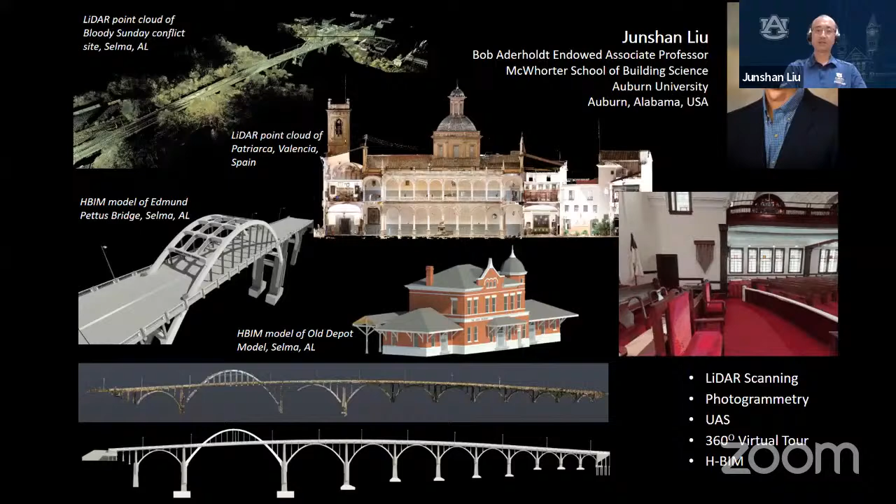So my name is Junshan Liu. I'm a faculty member at the School of Building Science at Auburn University in the US. Let me share some slides highlighting my research and teaching at Auburn University. As Dr. Ding mentioned, I've been working extensively with heritage structures, including buildings, bridges, and even battleships. My expertise is on documenting and digitally recording those structures, then presenting them to the public, and also digitally preserving those important heritage sites.

I've been in BUCA, I call that probably my third home. I originally came from China, that's my hometown, and then I came to Auburn for 20 years. That's my second home, and BUCA is my third one. I've had so many visits with faculty and students at BUCA.

Continuing on background, I received my civil engineering education back in China, before 2000. Then I started working as a construction engineer, later became a project manager in Shanghai, before coming to the US. Then I studied building science and became a faculty member at Auburn since 2003, so you can tell how old I am. I've been teaching for over 19 years. This fall I'm starting my 20th year of teaching academic career.

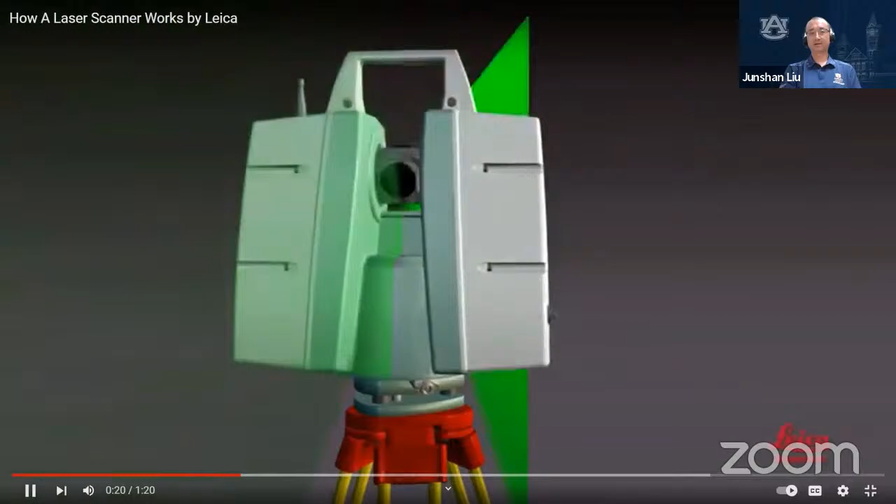It's explaining how the Leica brand laser scanning works. It shows the laser, the green. It allows the beam to reach the object and bounce back to the scanner, so it detects the distance from the objects to the scanner. All the measurements are recorded as a 3D point cloud, showing the angles, the distance, the XYZ coordinates of each point. So here's the result of the scan, the 3D point cloud, just a lot of points.

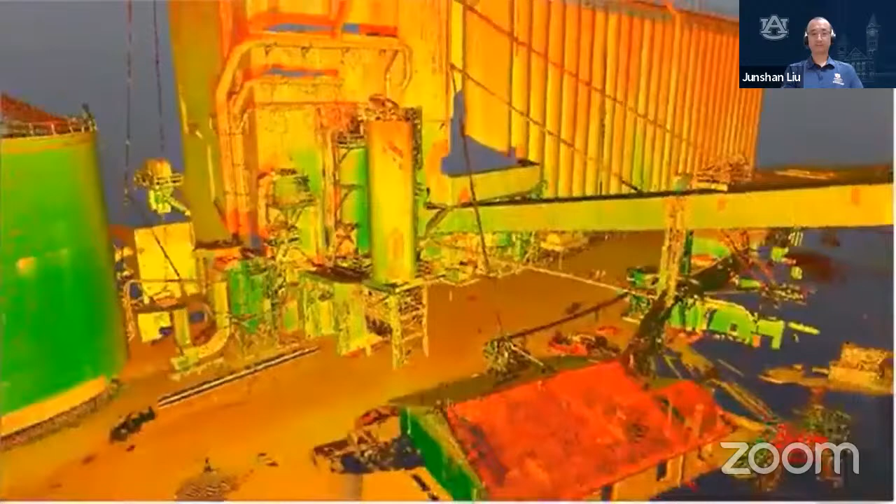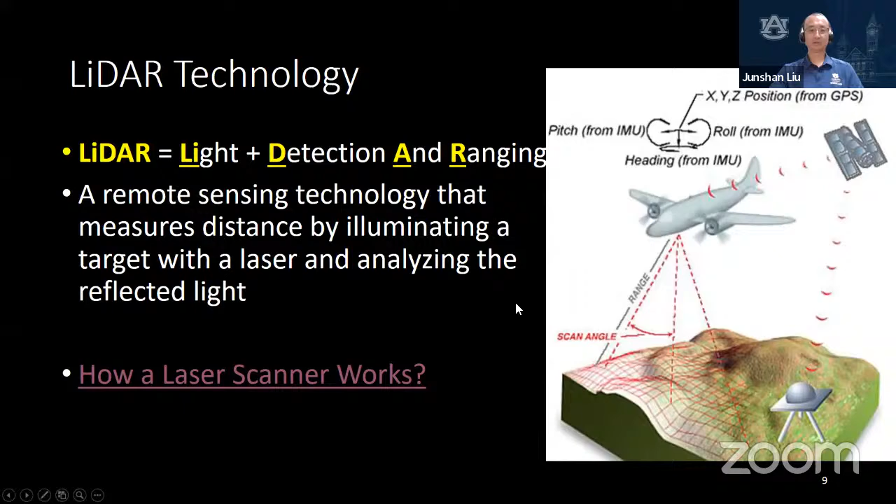The point cloud also has a technology called colorizing. It assigns colors to the points, and at the end you have this colorized three-dimensional point cloud. I'm sorry you couldn't hear the audio, but I can share this YouTube video with you after the presentation if you're interested. So here's the 3D point cloud. I'm going to show you the point clouds I captured in the next few slides.

The device we use for LiDAR is called a laser scanner or LiDAR scanner. There are quite a few manufacturers making and selling them, and I've been using two different brands. I started with a Leica ScanStation C10, about eight years ago. You see on the left it's a really big scanner, about 50 pounds or 23 kilos, just the device. It's also really expensive; I'll show you how much that costs.

The second and third ones are both manufactured by Faro, so they're much smaller. For us to use them in construction management, we'd like something smaller and mobile, so we can put it under the foundation, under the structure, in what's called a crawl space, and also in really tight spaces, like in a battleship. So those scanners became more popular and much more affordable. So I want to show the specification for each scanner here.

As mentioned, the Leica scanner is really big, right, heavy, but the technological feature is quite impressive. It can capture 50,000 points per second. So that device shoots out a lot of laser beams per second, and can get like 50,000 points. That's a lot of points per second.

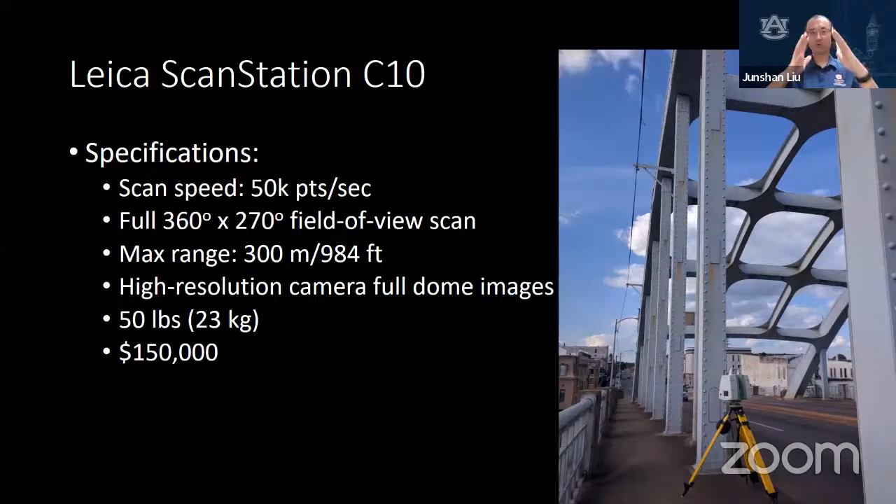This thing can spin 360 degrees horizontally and 270 degrees vertically. So the scanner will not be able to capture right at the end of the tripod, as you can see in the picture. That's kind of the blind spot or angle for the scanner. It can reach really far, as far as 300 meters or a little less than 1,000 feet. That's long distance in terms of laser scanning.

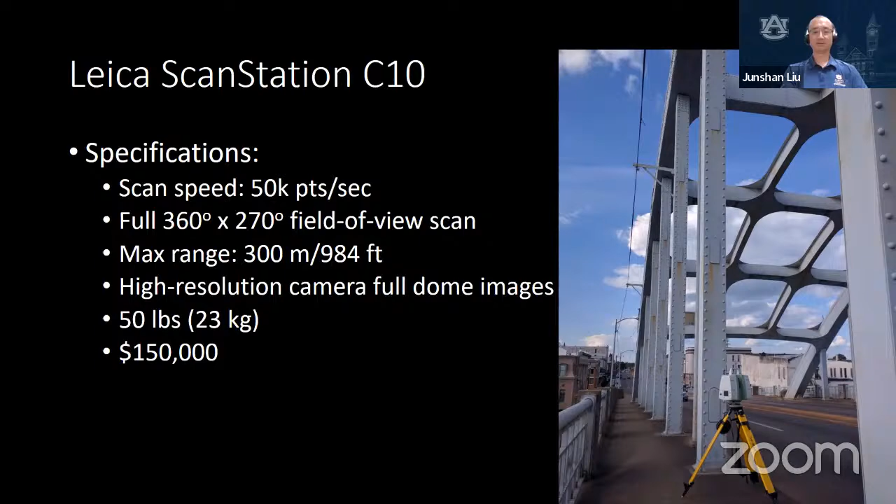It also has built-in high-resolution cameras to take some pictures, and it's big, right? 50 pounds, and it costs a lot of money. It's $150,000 at the time we bought it, that's 8 years ago. That's a really expensive device, and that's only for the hardware. It costs more to purchase the software, and also costs a lot more to have the people to operate and maintain the device.

So the next one, I started using the Faro X130 about 4 years ago. It's a smaller scanner. It can actually capture more points, almost like 1 million points per second, 20 times the one you saw on the Leica. The same field of view, right? 360 degrees horizontal and 300 degrees vertical. And the range is actually shorter, 130 meters compared to the Leica, or 400 feet. And it has a built-in HDR camera.

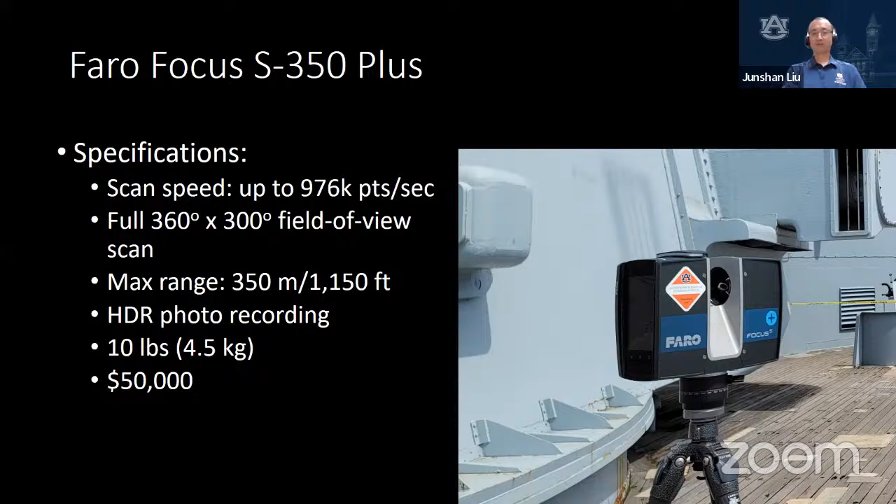It's much, much smaller, 1/4 of the Leica, so that's one I can carry really easily in a building or a really tight space. It costs less than 1/2 of that of a Leica. It's $60,000. Then about 2 years ago, I started using the newest model called the S series by Faro. It captures about the same number of points per second, a longer range, 350 meters, only 10 pounds, and less expensive, like $50,000 for the hardware. That's a lot more affordable now. Technology has gone a long way.

All right, what I scan. Talking about all the LiDAR scanners, things started getting boring, but I want to make it more interesting. As I mentioned in the beginning of my presentation, I work with a lot of heritage structures: buildings, bridges, roads and ships. At Auburn School of Building Science we teach construction management, so we work with new buildings on project sites, and I have been scanning a lot of ongoing construction projects.

So this is one of the structure labs I scanned in March of 2021 on Auburn campus, right after the steel structure was erected for the building. The purpose is to document the steel, like the columns, the beams, the girders, and also the connections, because those steel structures will be enclosed later in the construction process by the walls, the glass curtain walls, the roofs. So people won't be able to see the majority of the steel members.

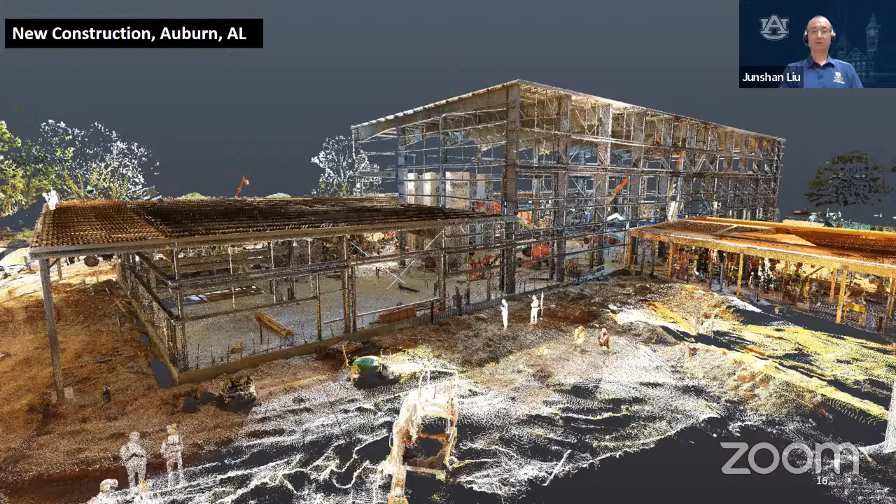But down the road, if the building goes through renovation or maintenance, people need to identify the exact locations and condition of the structural steel, and they will have a problem, right? But if we have a digital record, the latest scan of this, we can open up the point cloud on a computer to show them exactly where those structures are and what condition they were in when they were erected.

So here I'm going to show the close-up or detailed view of the scanned point cloud of the structural steel. As you can tell, it's really detailed and comprehensive coverage of the steel part of the building. And the accuracy, you will hear me say that word many times in the presentation, is very, very good for laser scanning. It can be as accurate as 2 millimeters. So that gives you the capability to go into the point cloud on your computer and take a measurement of the structure. That's something that wasn't available before LiDAR technology.

So this is another construction site that I scanned last May. It's another building on Auburn campus. I have a few slides talking about that later, but you can see this kind of documentation or record of an ongoing construction project. You can see the slab, right? The concrete slab or the floor. There's a lot of construction materials.

In the background, there's a structure called a metal stud. So this metal stud is kind of a framing member for the partition walls, which will be covered by the drywall. So we have a record of that. It can be easily accessed.

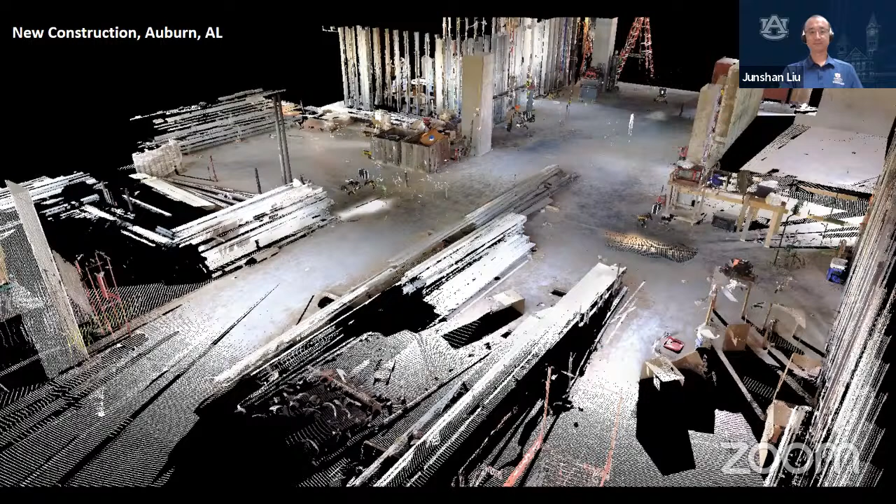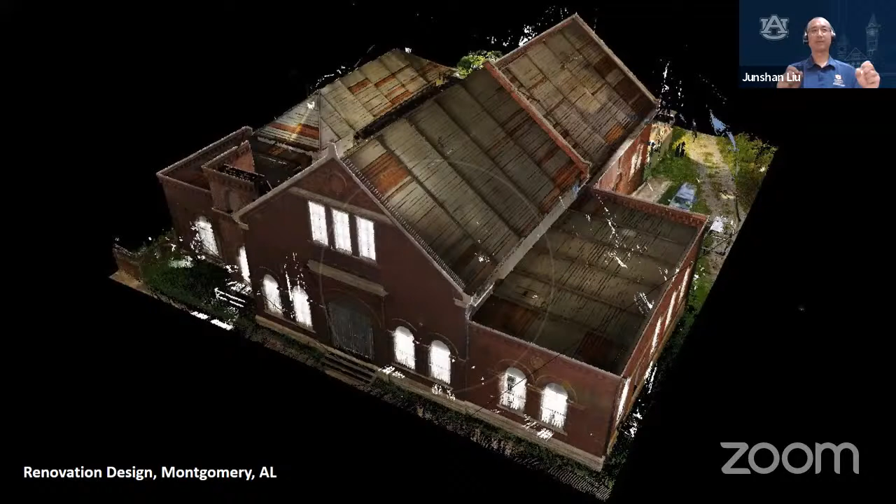All right, so here is a renovation. I scan a lot of buildings, like heritage buildings or existing buildings for renovation purposes. You know, when you need to design a retrofit or renovate a building, reuse a building, you need to have an accurate measurement of the existing condition of the building, right? And then the designer can use the measurements to come up with a new design.

So this is a 3D point cloud of a scanned building, and that's the interior of it. I just removed the roof on the point cloud so you can see the inside. It's a water pump house. So there's a lot of heavy machinery in the building. So I scanned it before the demolition of the heavy machinery, and I also had another scan right after. You can see the space opens up.

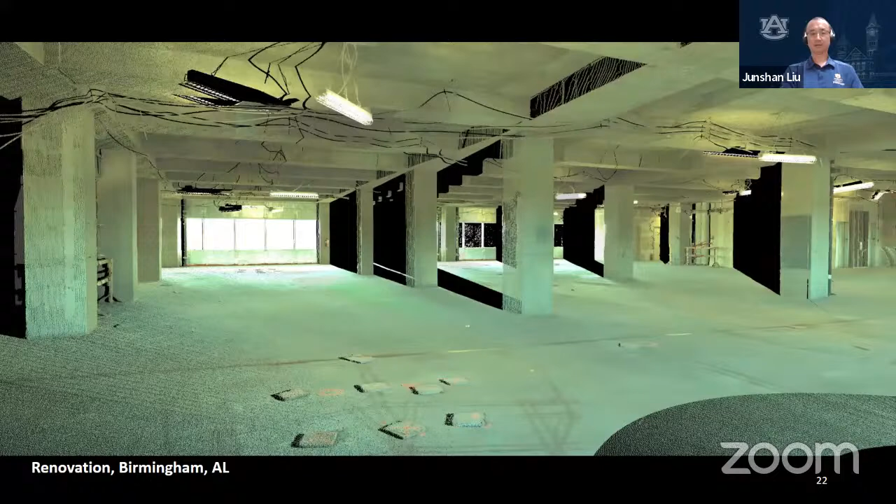So this, again, is a really accurate digital record of the building. So people use that for design. It's another project I scanned in Birmingham. That's an older scan, also for a renovation purpose.

All right, so here, people may ask, how would you do the scan, right? Do you just take one scan to cover the entire building, or do you have to do multiple scans? So normally, LiDAR doesn't go through any object. So to cover a building, especially inside and outside combined, you have to set up the scanner at multiple locations, around the building and then inside the building, in all the rooms you want to scan.

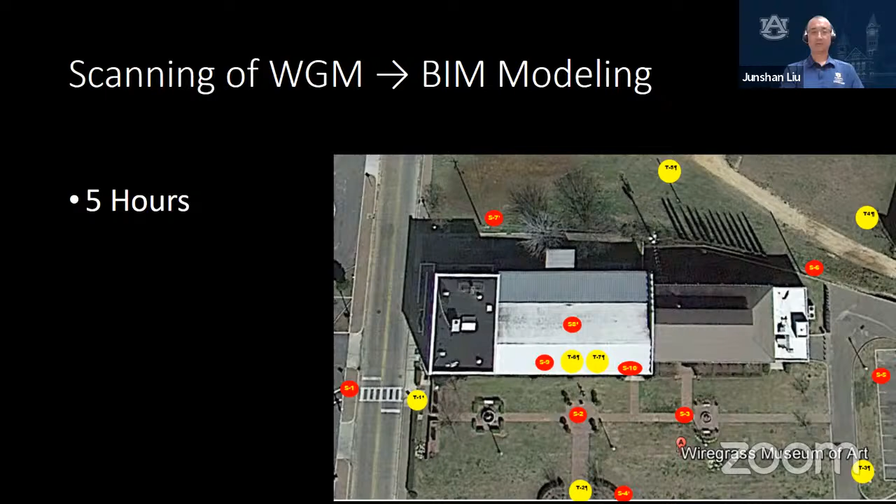So the picture here is actually one of the older projects I did years ago. I used the LiDAR, the older Leica scanner, the Leica C10. It took me 5 hours. I set up 7 different targets. The targets were used as reference points to connect the multiple scans together. And I set up at 10 different places.

You see the red dots, right? It's a small museum building in Alabama, so you can see the red dots. It covers 7 of them outside and 3 inside for the entire coverage. Then at the end, I had 780 million points captured for this point cloud.

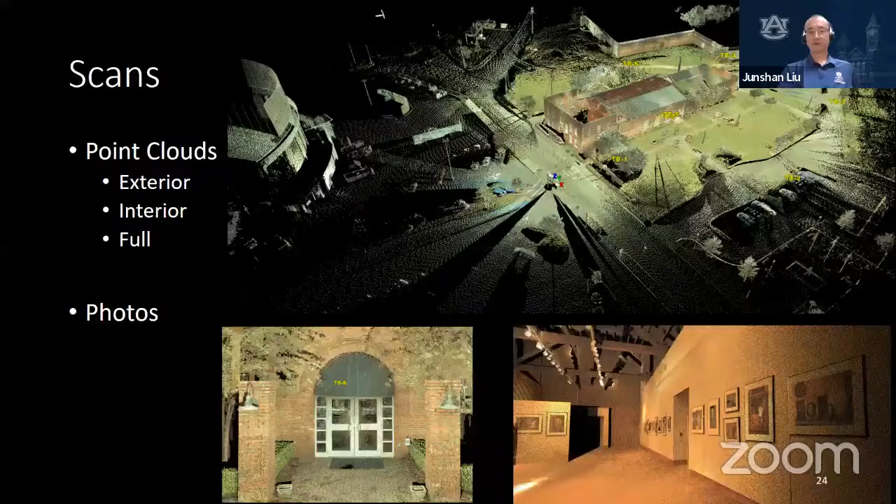So here are the pictures of the point cloud we recorded using the scanner. You can see the overall image on the top right. Then there are 2 smaller ones highlighting the front entrance and also the interior. Because there are so many points, it almost looks like a photo, right?

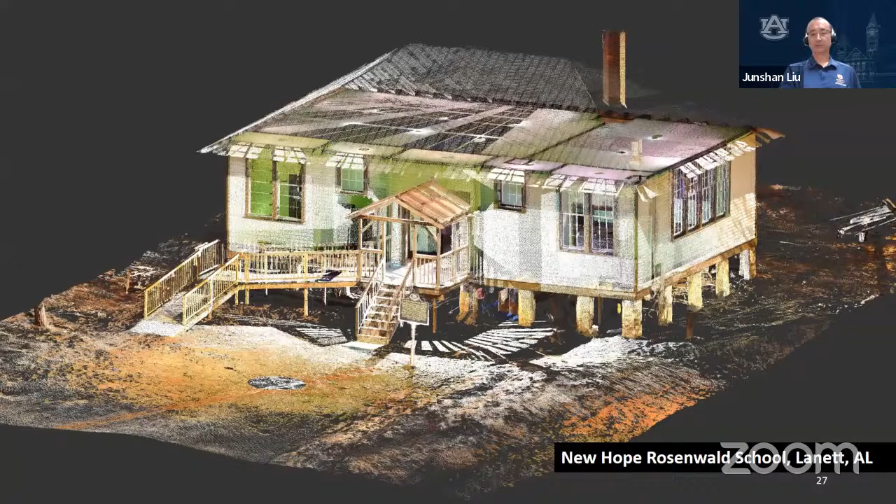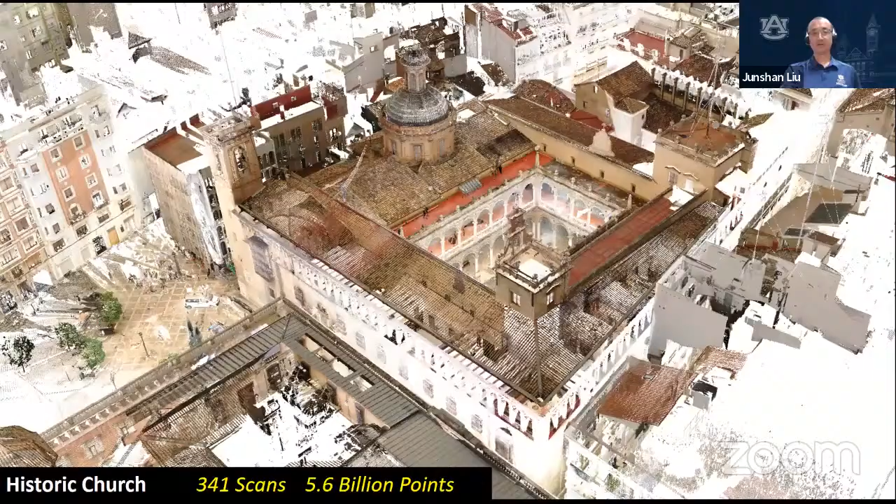For this one, I had over 300 scans. At the end, we captured 5.6 billion points. That's with a B, so that's a lot of points. So here's another cut, another view of the point cloud of the same building, just so many points.

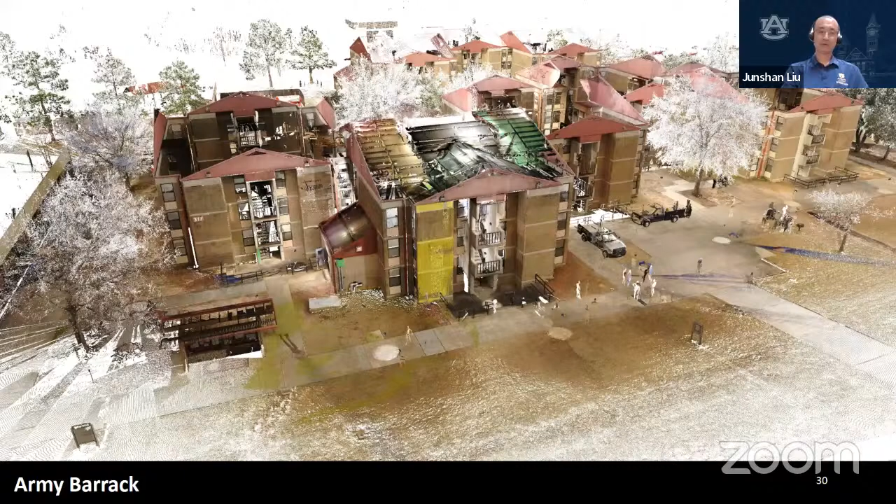All right, and also I work with the U.S. Army Corps of Engineers, on military construction. This one is the Army barracks I scanned in Georgia. So this is also a large project. It took more than 130 scans for renovation purposes, and they got 1.8 billion points.

All right, and I also work with battleships, right? The World War II naval ships. So this one is called the USS Alabama battleship in Mobile, Alabama. I had a project with them.

So here I want to show you guys a small walkthrough, like an animated video of the captured point cloud. This point cloud is just a small fraction of the entire battleship. So I spin this again. It's not a model or a picture. This is just a point cloud. It has, I think, like 1.8 or 1.7 billion points.

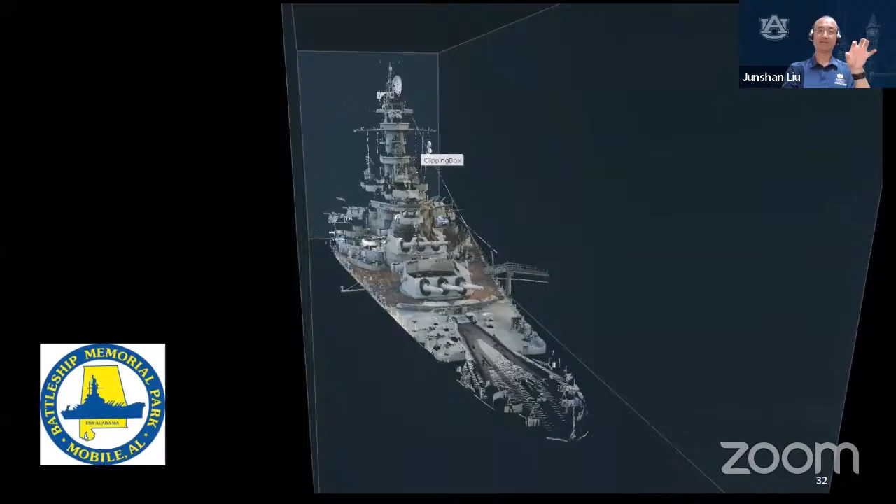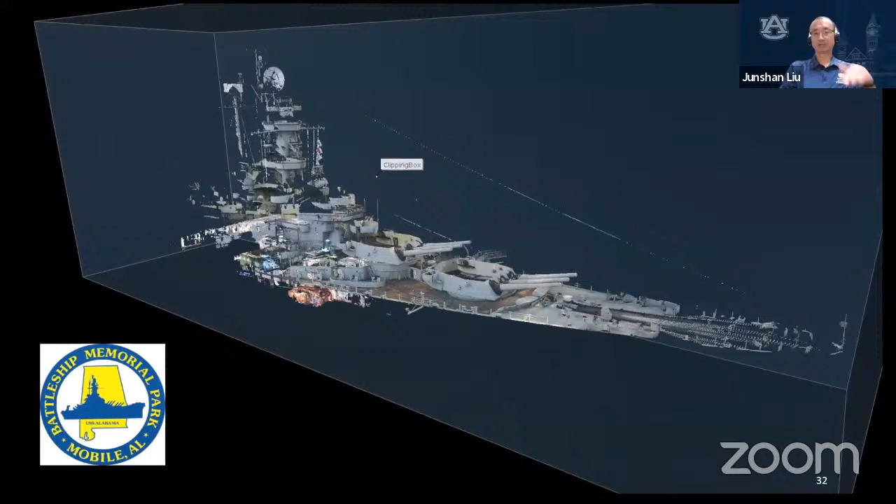It covers the front, which is called the bow of a ship, right? The front, you can see the main guns, the superstructures, and also I had some scans taken inside of the battleship. As you can see, the end of the deck, the middle, it looks like purple. So now we're getting close to the deck, and then we'll go inside.

So showing this, I want to give you an understanding of how detailed the point cloud can be, right? And what it can capture. So those are like a black box hanging in the air. That's where the scanner was set up.

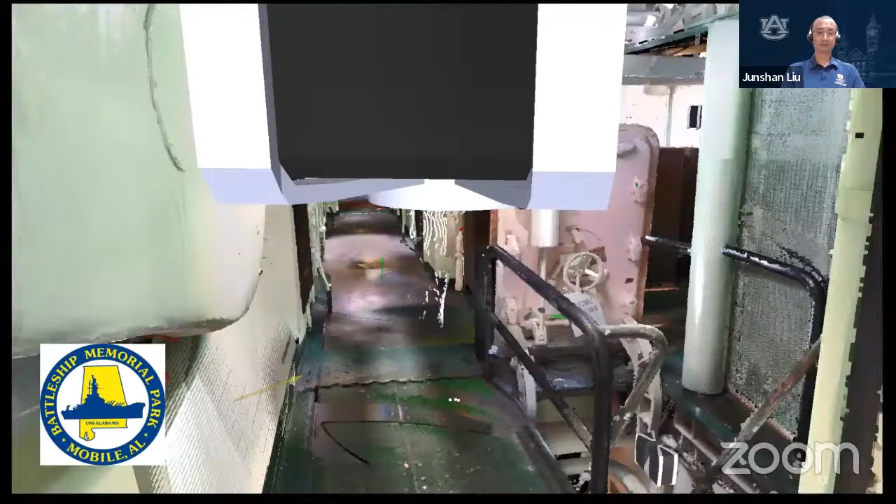So now we get inside, we're gonna turn left. We actually will go down a little bit, a couple levels. So you can see the scanners, there's a lot of scanner setups. So another level. Again, this is not a video, it's animated, I call it a fly through of the point cloud.

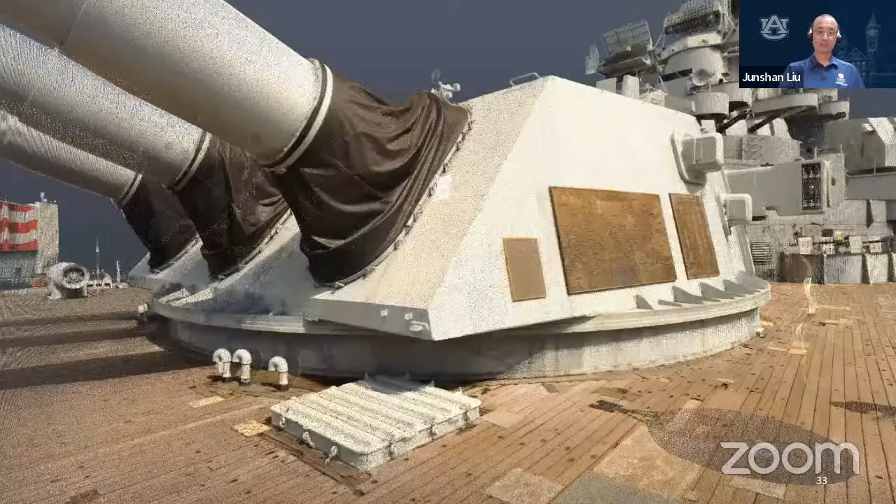All right, so here another, just a still image of the point cloud captured of one of the main guns of the battleship. Just want to show you guys the details, right? It's a lot of points, so dense, they almost look like a model.

So here, talk about the measurement accuracy. You can go in this point cloud, then measure, like pick up 2 points, and then find out the distance between these 2 points. This is a very, very useful feature for construction or for a digital record of a building. So I don't know if you may have heard of a digital twin, right? This point cloud is one of the very useful technologies for digital twin.

So here, the same for the battleship. I'm going to show you a set of pictures to show the comprehensiveness, right? The coverage. You can see it's a really, really complicated structure inside the battleship. All right, this is a small section of one of the rooms and how complicated that battleship is, right?

You can see there's walls, floors, ceiling, and the pipes for the air conditioning system. We call it the mechanical system. There's pipes running the water, right? Like supply water, hot and cold, and also returning sanitary water. And you can see also the electrical, we call it conduits, right? The wires, cables. It's just like a mess, a big mess.

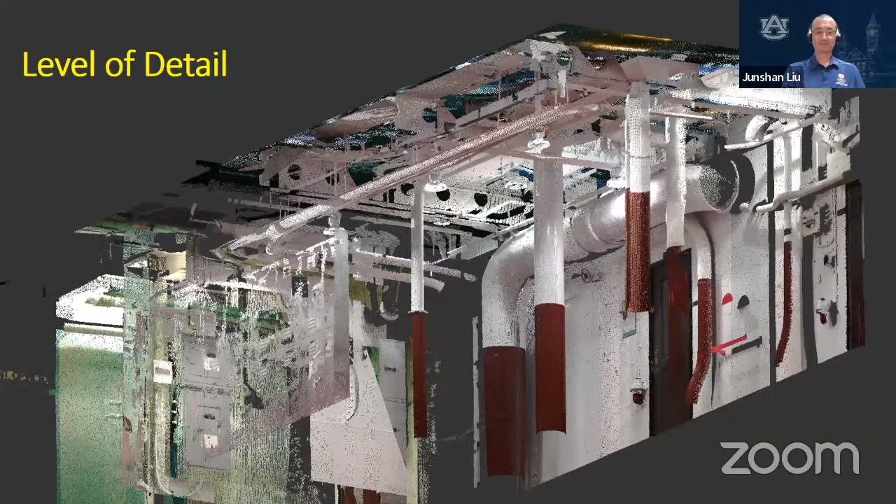So here you can see the point cloud can capture almost everything you can see with human eyes. And also you can cut a smaller section to show the 3 different levels of the battleship inside. If you want to check more details, you can zoom into one of them, right? They all can be done on computer using the point cloud.

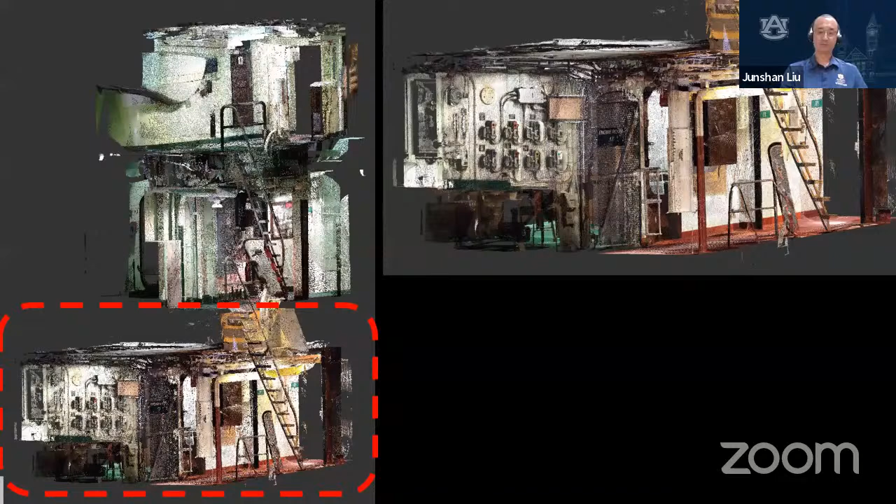So here, this room is called the damage control room. If you want to see what's on the wall there, what this box is for, right? The switch panel for damage control. You can zoom in to look at it again.

You can also cut a small slice of one of the rooms in the point cloud, then make a plan view. This one can be converted or used to make a CAD drawing, right? Computer aided drawing, so a 2D plan, and then you can use that to design. Because it's a museum now, right? The curator of the museum wants to know how much space this room has, so they can set up an exhibit. This is a very useful tool for them.

All right, what else? So other things I scanned, I also scanned the submarine. That's another project I've been working on since last year. It's a World War II submarine. So we scanned this, had a digital record of that. And those are the guns on the deck. And also the aircraft is another World War II aircraft, the B-25. We scanned that as well.

We also scanned trees, right? This is one of the symbolic trees on Auburn campus. But unfortunately, both trees died a few years ago, and then they were removed and replaced. So we scanned the trees before they were removed. There's a long story behind that. So I also went to the desert to scan some rocks in the desert in Wyoming.

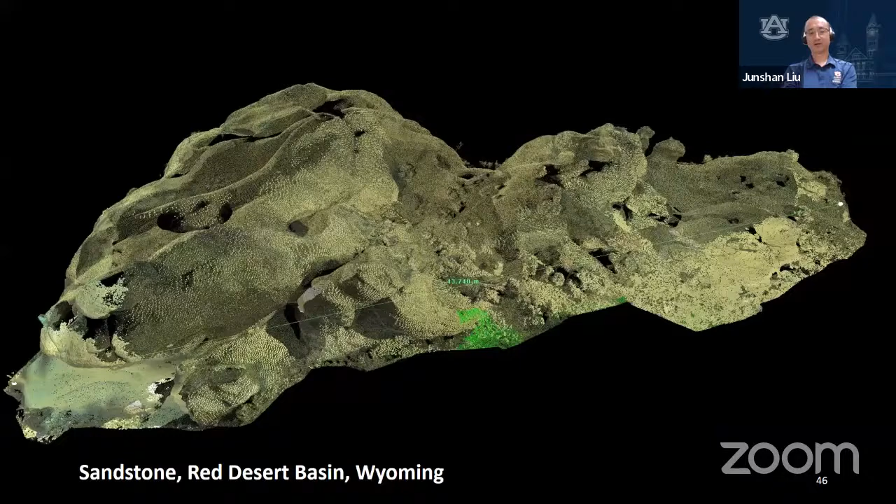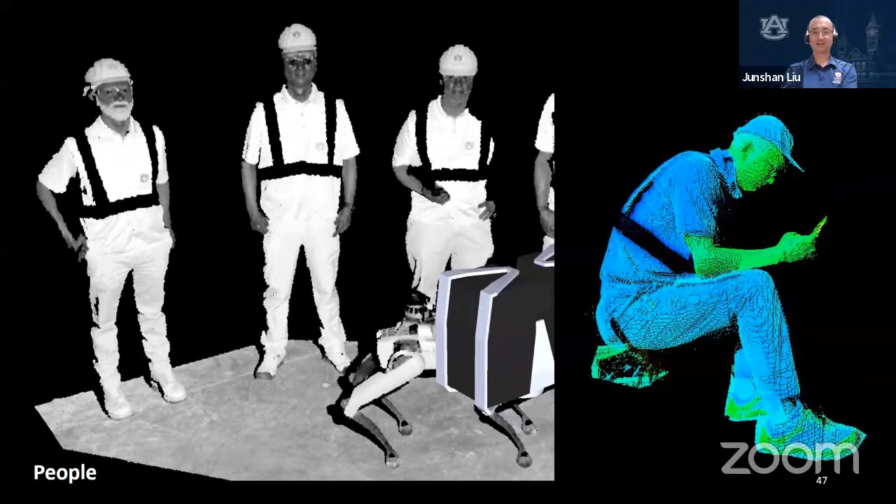If you get a good, accurate point cloud, you can use the point cloud to develop BIM models, building information modeling. And you can conduct land survey for a field using LiDAR scans. And if you scan the structure periodically, you can monitor structure deflection, structure settlement, or damage.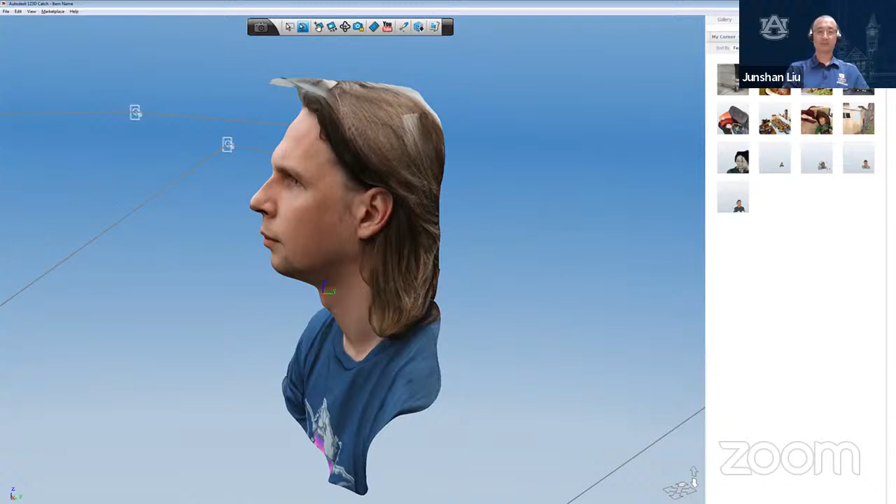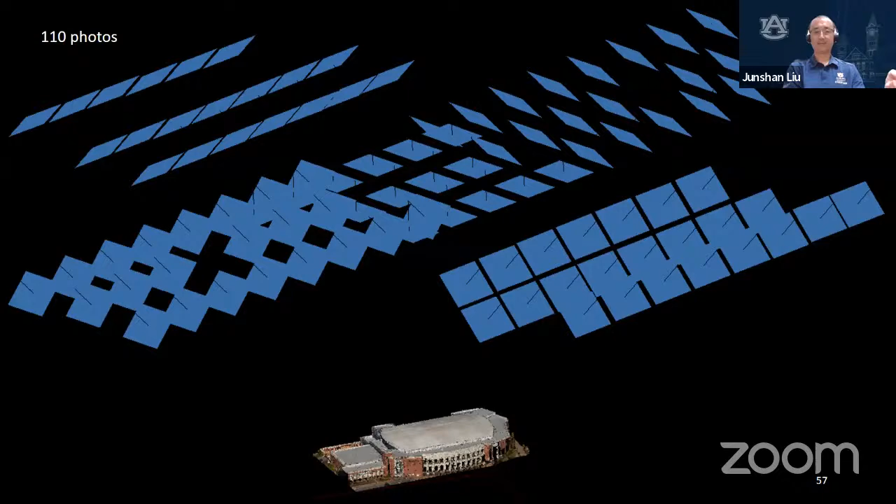So by doing this, you will have a point cloud of a building. Like this one, I used 110 pictures to cover a basketball arena on Auburn campus. So we have the point cloud created right here. This cloud has more than 14 million points. So you can see the roof is really good, right? But the front facade is not much. See, it doesn't capture any glass walls in the building. The images are really limited. Also, the accuracy does not match the LiDAR scan point cloud.

All right, Battleship Park: we flew a drone, a UAV, to take a lot of pictures. This probably has more than 1,000 pictures. And then we made a photogrammetry point cloud. You see the battleship and also the submarine at the lower right corner.

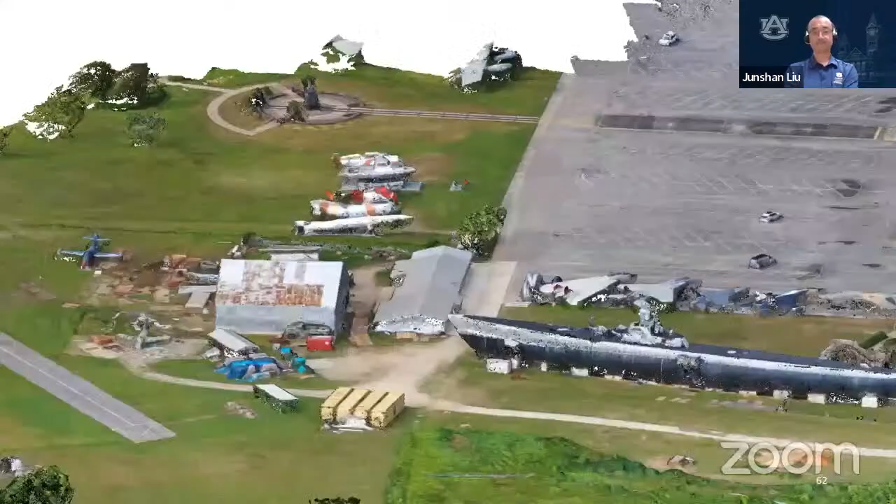And also you can create specialty pictures called a photo mosaic. This view is not a single photo; it's hundreds of pictures stitched together and projected to make one photo mosaic. You can see the documentation of the decking of the battleship.

So the technology is for photogrammetry. Basically you fly a drone, take pictures of a structure, then use a program to process them and make a point cloud. The point cloud can be used for documentation - even if it's not super accurate, it still gives good coverage - for renovation, land survey, and making a BIM model.

The pros for photogrammetry: number one, it's very cheap, as long as you have a good camera. You follow a particular route to take photos using the camera, or put a camera on a drone or UAV and fly it. That's very cheap - most likely it costs just a few thousand dollars compared to $50,000 or $100,000 for LiDAR.

Also, because it's cheaper and more mobile with the camera, you have more flexibility to capture data using photogrammetry. You can also capture a larger site if you fly a drone, and it requires less training. But the disadvantage is low accuracy - you also can't take a picture in the dark, and you cannot fly a drone in high wind or rain, in bad weather conditions.

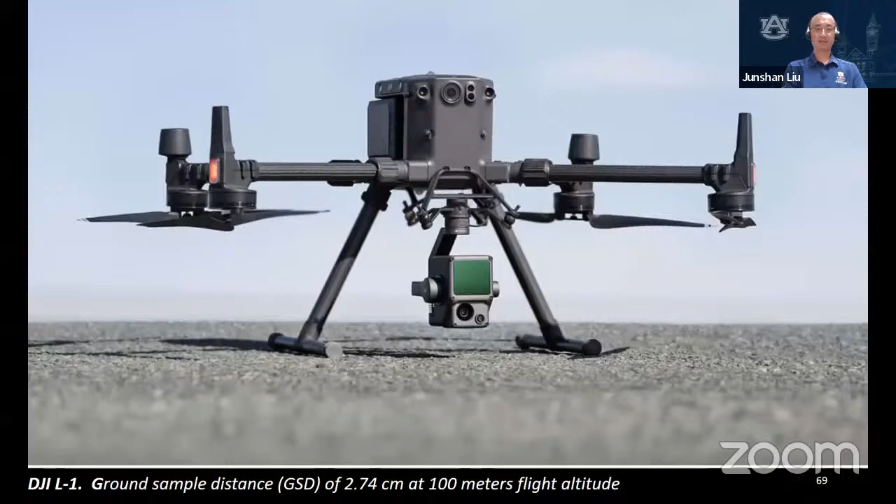So the future trend for LiDAR technology is to go airborne. I know manufacturers are starting to make drone-based scanners. One company, US-based, is called Micro Drones - I've been talking to them for a demonstration. Another one, a Chinese company, is DJI - they had their first generation LiDAR scanner on a drone called the L1, which is one of the best available in the market now.

And most recently, Leica just released this one earlier this year - it's also a fully autonomous drone-based LiDAR called the BLK2FLY. I was able to attend a demonstration in Las Vegas last month, and I'll show a small video. The drone was flying and captured one of the big hotels in Las Vegas.

The next technology is called 360 photography. The end product is a virtual tour - I've been using this for a couple of years. This is newer technology; let me show you a link. It creates something called a virtual tour - I know you guys have seen this before, like a virtual walkthrough. It's basically interactive 3D or 360 imagery.

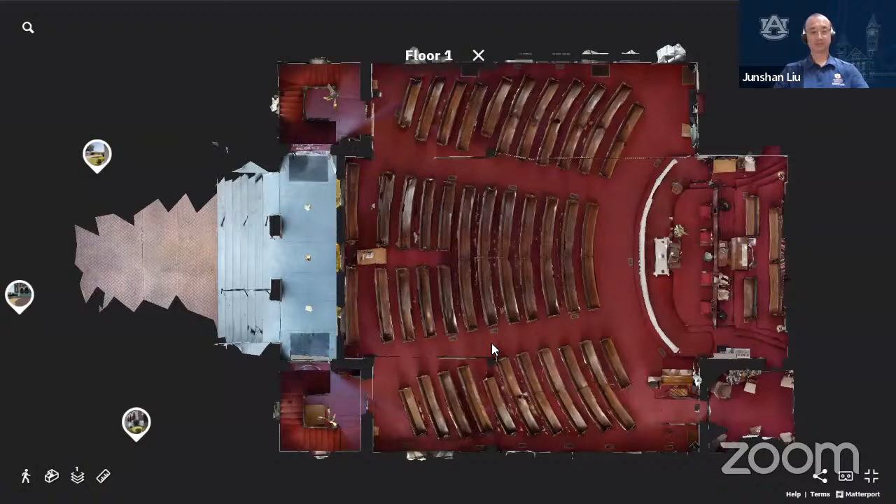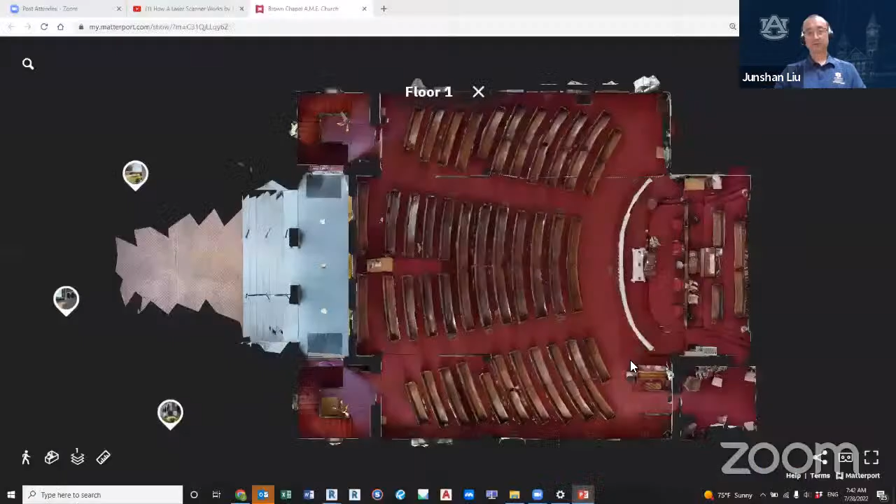For construction, you can use the same technology to scan a new construction, a new building, right here - this is an example. Then you can attach additional information in this virtual tour, like this one tied to a specification or manual of a particular equipment. It's a PDF document - if people want to learn more about the equipment, the operator or user of this room can have access and open this up.

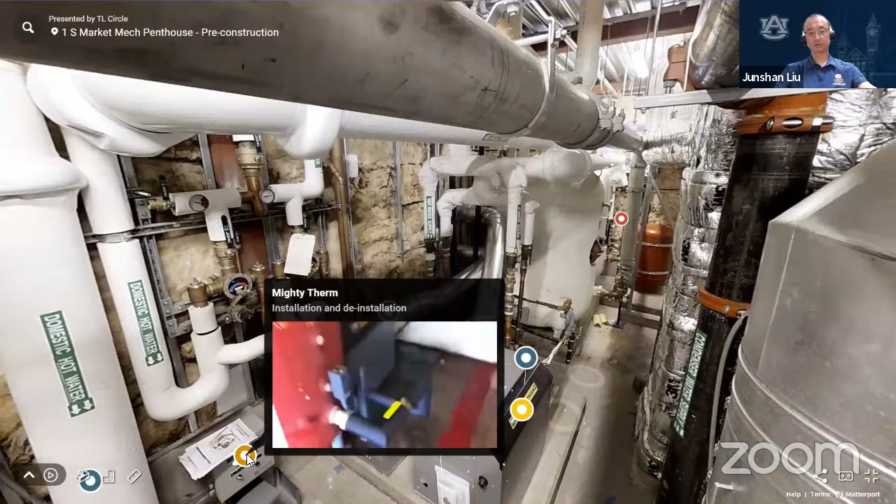That's another piece of document. You can tie it to a video - a video tutorial showing how to operate or how this equipment works. You can also tie it to a hyperlink or to photos, so a lot of extra information or comments. This is really useful for new buildings as well, because of this feature of linking other information or documents to the tour.

So this one I captured a submarine for the Battleship Museum. It's still an ongoing project. It's the battleship as well.

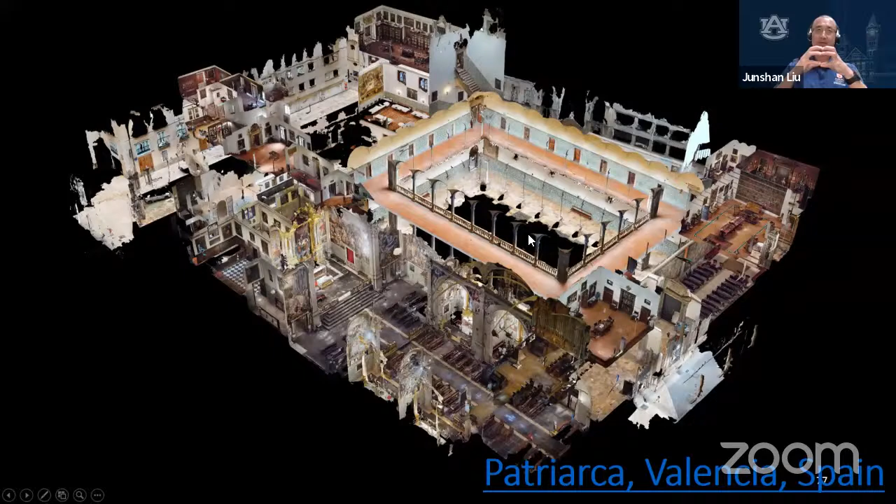This is another tour I captured in Valencia, a large project. Again, 360 photography gives you a virtual image that allows people to visit that virtually. Think about a museum, or education can use that.

All right, so here I have a couple of case studies. I want to combine the three pieces of technology and put them together to make a whole story, to show you guys how they work incorporated and coordinating together to document a historical building.

So here, this old courthouse in Florida, Central Florida. The building was built in 1908, a little over 100 years old. It's a courthouse, but now become the museum for the county. It's about 5,000 square meters, or 50,000 square feet, and has 3 levels.

So the purpose of the project is documenting it, having a digital record, and also making a BIM model out of the record. Here's the timeline of the structure: built in 1908, had 2 major renovations and additions, and now became a local museum. Historical photo on the left, the original, and the current view on the right.

So some field photos, we captured this in October 2021. We used different technology, including LiDAR and drone, 360 photography, and also the old school conventional way, like tape measures and taking pictures.

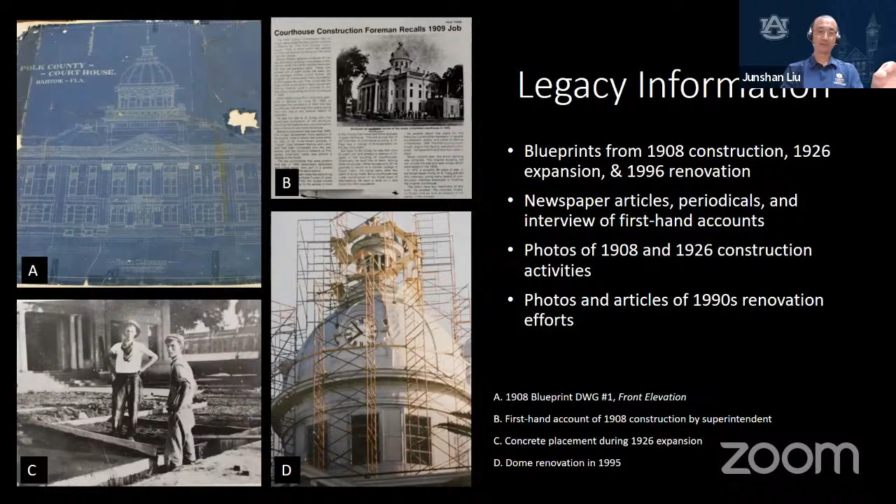And the equipment - before we started, let me show a picture of all the equipment we brought to site. We also did pretty intense planning. We checked the weather, estimated how much time we have and how much time we're going to use to capture it, and also accessibility, and the scanning plan for where we start.

This is the floor plan we used. We mainly captured the area inside the red lines. So here's the equipment that we used.

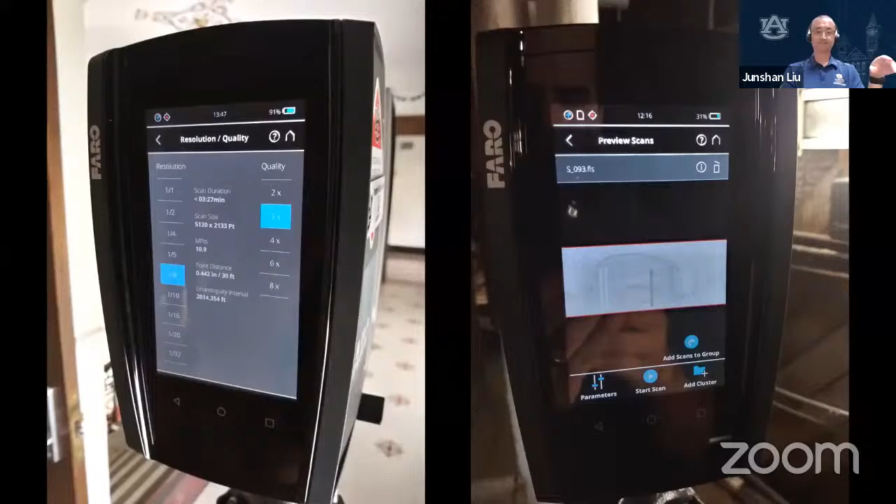So a little bit about the scanner setup and interface. We took a few of the nodes to show where the scanners were set up.

So the 360 photography is done with the Matterport Pro 2 3D camera. We spent 6 hours and had 470 setups. That's the result of the scans - you can see those blue circles, that's where the 3D camera was set up on 3 different levels.

I also flew a drone to capture the building in the right circle, just for the roof structure, because when you do the 360 camera scan, you cannot reach the roof since it's so high up. So I flew a drone to take a lot of photos - I had 950 photos just for the roof structure.

200 of them were looking straight down, kind of a bird's eye view, and 750 of them at an oblique angle, 60 degrees. I flew 150 feet, about 45 meters above ground, and each picture has pretty good resolution.

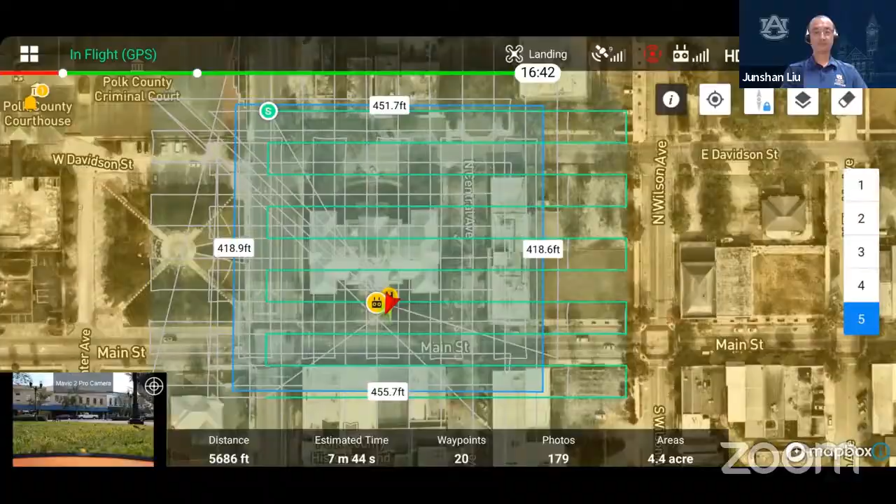So here with the DJI drone, you can see the flight patterns - we flew 5 different routes above the building. You can see the background, that's the courthouse. And that's me trying to launch the drone, it's a DJI drone with my cell phone as the remote control. Some pictures captured during the flight.

We also took measurements to verify details of the building, including the structural steel. We had a field capture in the daytime, then started processing data at night, running 2 computers side by side.

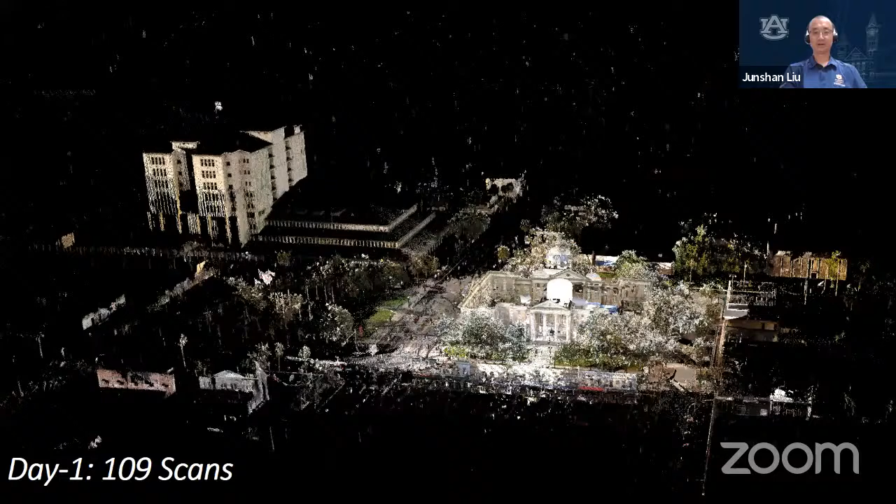Then we had initial data, you can see the point cloud. Because the scanner can reach so far, adjacent buildings and conditions were also captured. So the courthouse building doesn't look really nice yet - that's the initial stage.

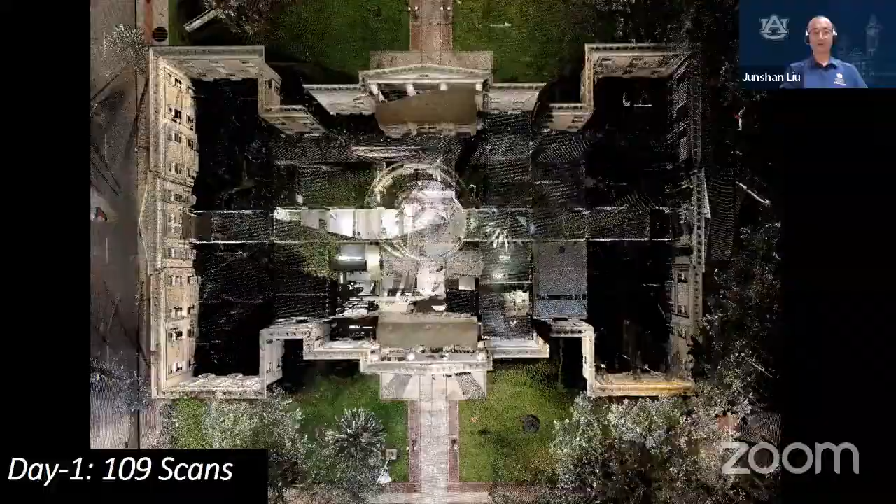At the end, we have 1.8 billion points from all 241 scans. You can still see a lot of information missed, like the roof. This later scan doesn't have the drone pictures and the dome - you can see we missed the top part.

It's a section cut, you can see the inside - the inside capture was very good. This is the virtual tour 360 photography of the museum, with 3 different levels of floor plans, and this is a little animation of the virtual tour.

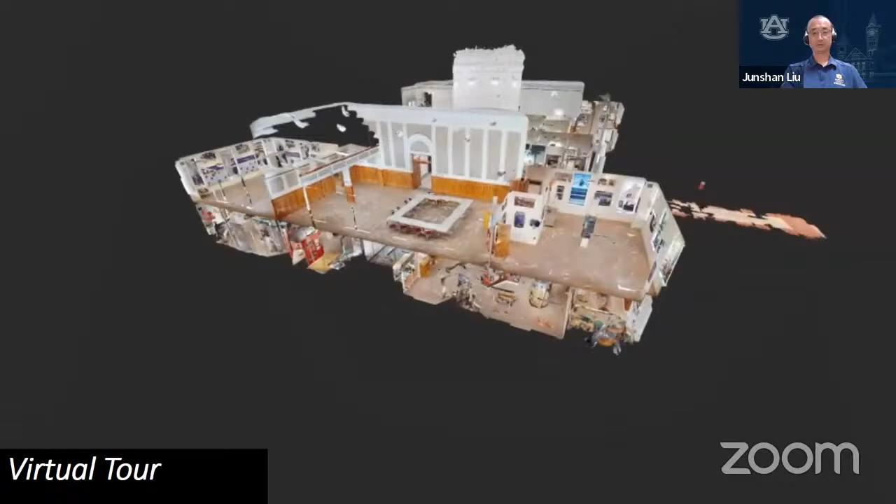Here I want to show the actual tour. So here the drone image, you can see all 950 pictures - they all align in the air. The process uses photogrammetry point cloud, mainly for the roof of the building.

So here there's also a mosaic view of the roof. As a summary, we spent a total of 30 hours on the field with a group of 3 people, and post-processing in the office took about 12 hours to get the point clouds.

I would say we covered about 70% of the surfaces of the building, but there are still quite a few sections not captured, because of the accessibility of the spaces, and also the roof part. As for cost estimate, I know there are professional companies doing this kind of thing - they're quite expensive in the US.

The second case is what I did in March in Valencia, Spain, in Europe. This historical church was built in 1583, almost 500 years old - it's a symbolic building in the city. We were able to capture that to show the map - this is Spain, Valencia, where the building is located.

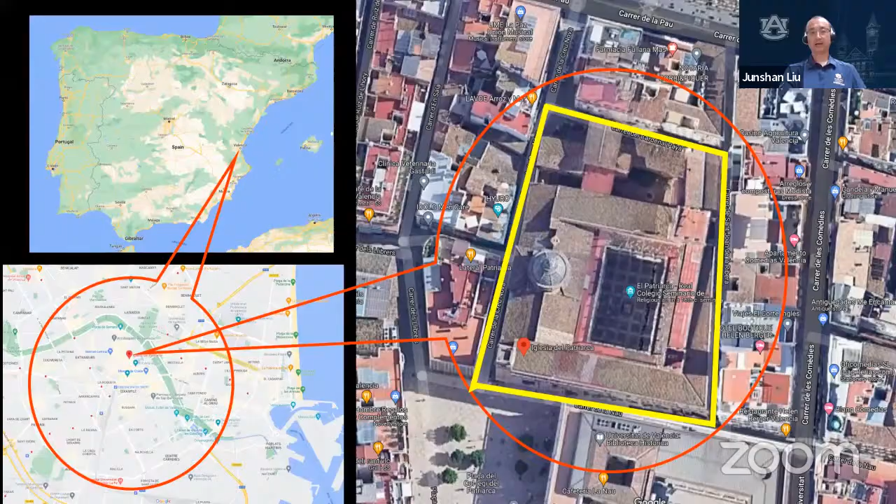We had 2 scanners, about 42 man-hours, and captured 341 scans - the largest scans ever captured. We got 5.6 billion points. You need large space just to store the data - 210 gigabytes of project data.

We also converted the data into different formats - each file format is really, really large. The picture shown here is a map of where the scans happened, set up inside the church. We also went to the attic, the library, and then to the main church.

In the library we have double scanners side by side, and the exterior as well, with my colleagues in Spain. So it's the roof and the field notes for the scans.

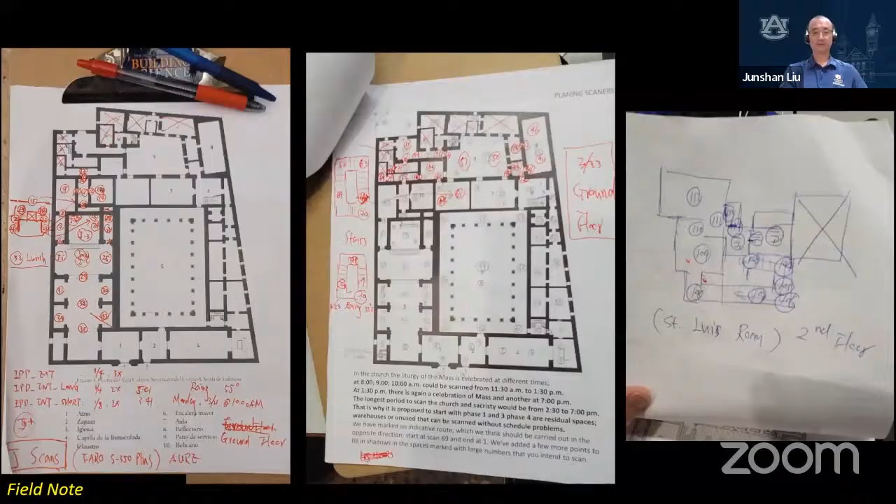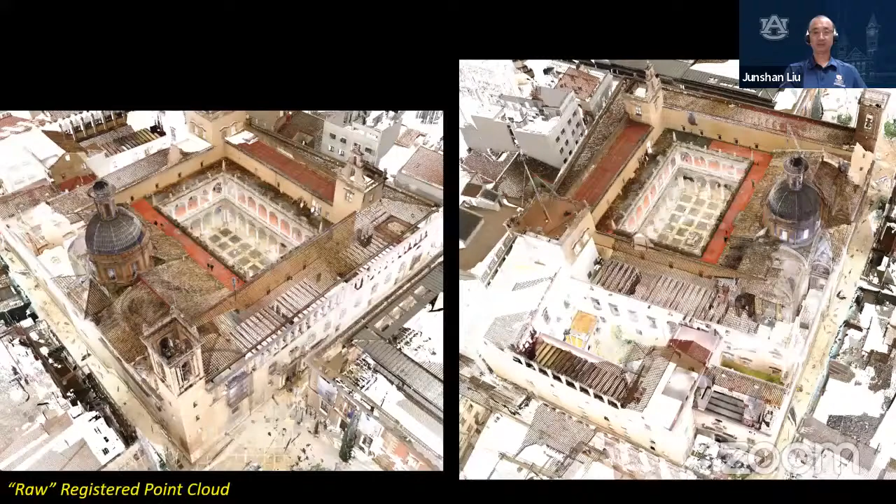Here's the overall raw data of all 5.6 billion points - you can see not only the church but also the buildings around it, the roofs, quite crowded. Here's a close up view of the church, not isolated to the church only - just a clean cut of that.

Really, really good coverage - that's a section cut, you can see the inside. There's a museum, a dorm room, the conference room - you can see through it, and at the side, the courtyard in the middle.

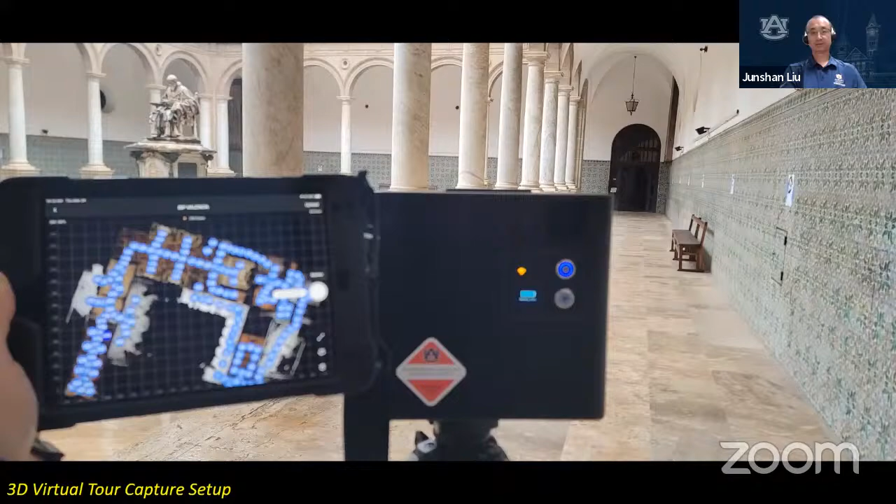The church has different sections - just to see how much detail it can capture, how dense the points are. There are floor plans for 3 different levels and the roof, and also the artifacts, like the sculpture in the courtyard. We use 3D cameras to capture imagery to make a virtual tour as well.

Just to showcase the quality of the technology, the visual quality.

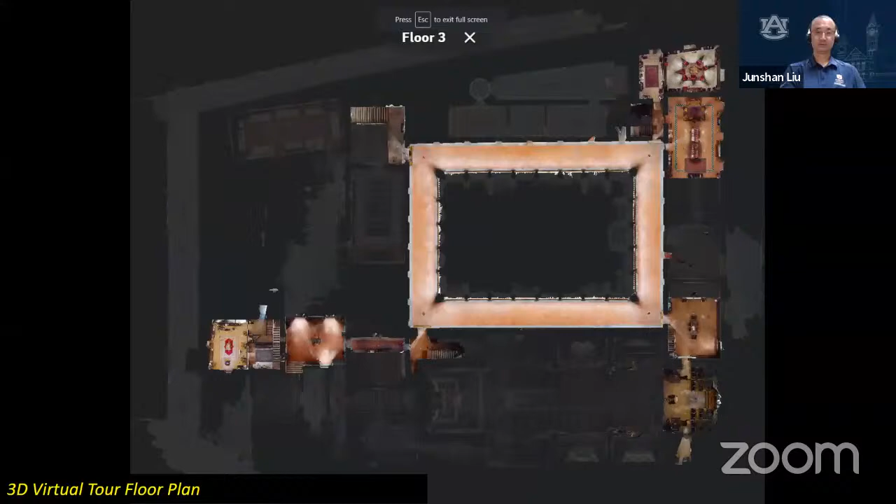The model becomes a building information model, called BIM. If the model is for heritage or historical buildings, it's called a heritage BIM, or HBIM.

So how it works, it's quite a simple three steps. The first one is to collect data for the structure you work with, using scanning, photos and 3D imagery. Then you develop models using the data captured, so the model is really accurate. And then you attach information to the model to make it a true heritage BIM.

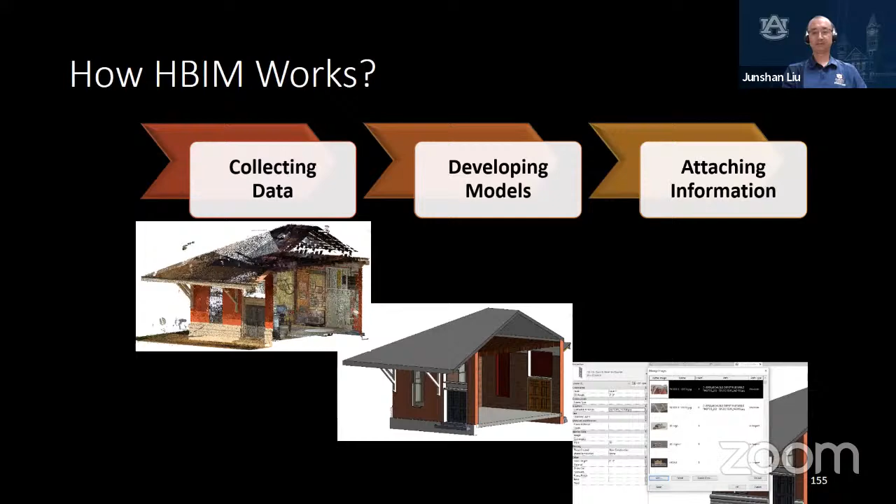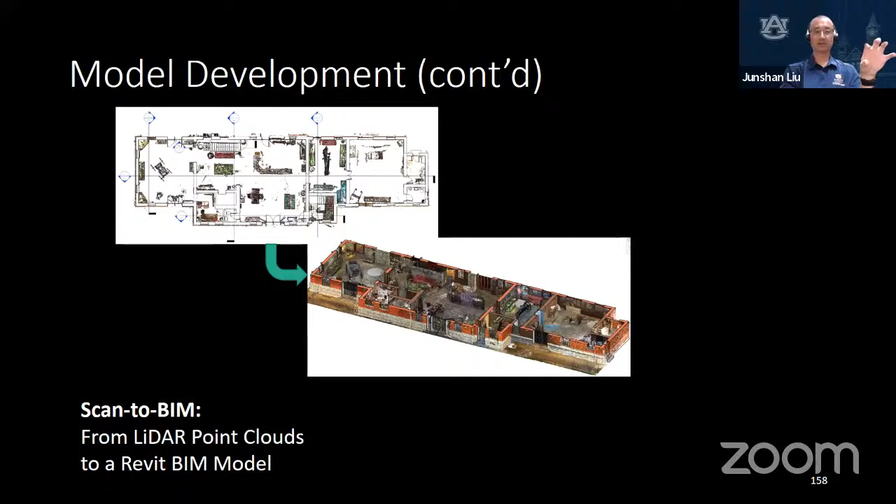All right, so for the developing process, basically you have the point cloud and the imagery, and you import the information into a modeling program like this one. You can see the point cloud in the background. Then you make a model and hide or remove the point cloud from the background, and just leave the true model there.

Another picture, the Old Depot Museum in Selma, Alabama. The model development, you can see this was actually in Autodesk Revit. Then you have the model rendering, with information attached to it, just some pictures, historical photos of the windows and doors. So a little case study for that project.

So one of the old train stations has now become a museum in Selma, Alabama. It has a lot of artifacts from prehistoric Native Americans, and also from the Civil War, World War II and the Civil Rights Movement as well. We were able to find one historical record. This is a sketch of the building floor plan. That's it. That's all the drawings we were able to find for that building.

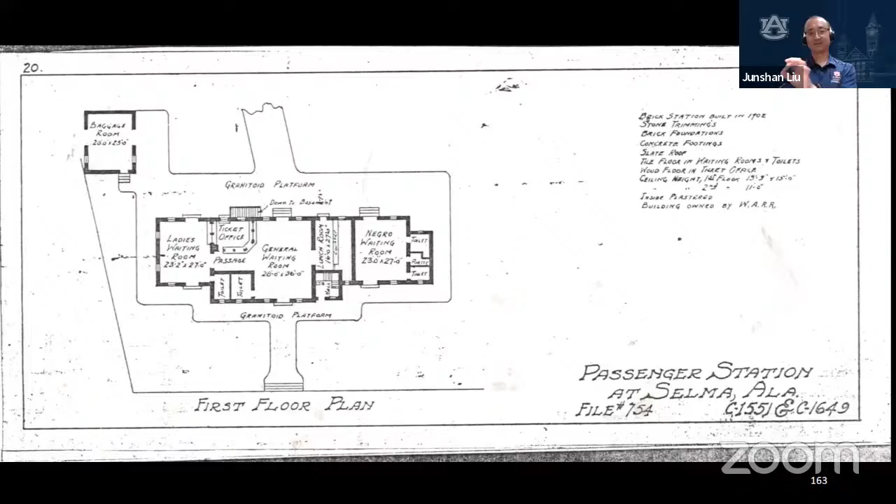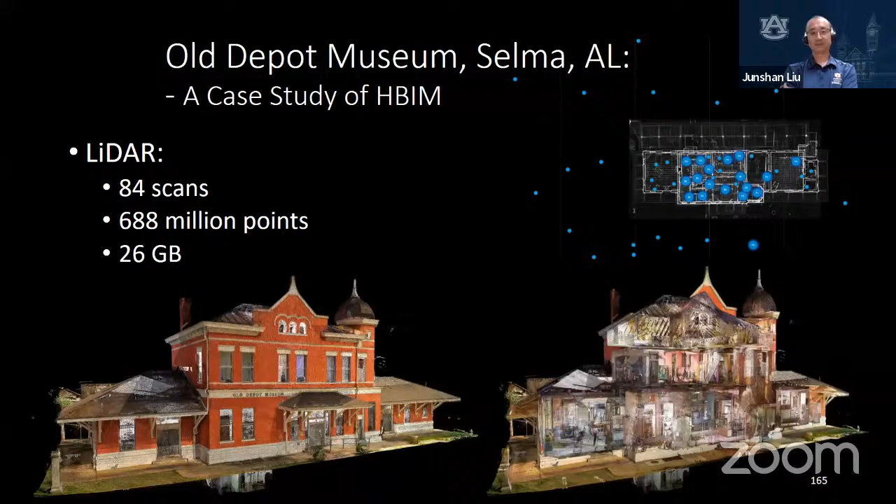But we took a lot of scans, LiDAR scans. We got really good coverage and measurements of the building. Then we used the scans, the point cloud, to make a BIM model. In the scans you see the little basement inside one of the civil rights rooms. And we also flew a drone to capture the roof structure, just aerial photos.

Okay, so here is the modeling process. We start by importing the point cloud into Revit. Then we set up the main levels and elevations. And then we model the walls, the floors, the roof, ceilings, the brackets, the doors and the windows. And at the end, we have the decorative elements like trims and moldings to make the model.

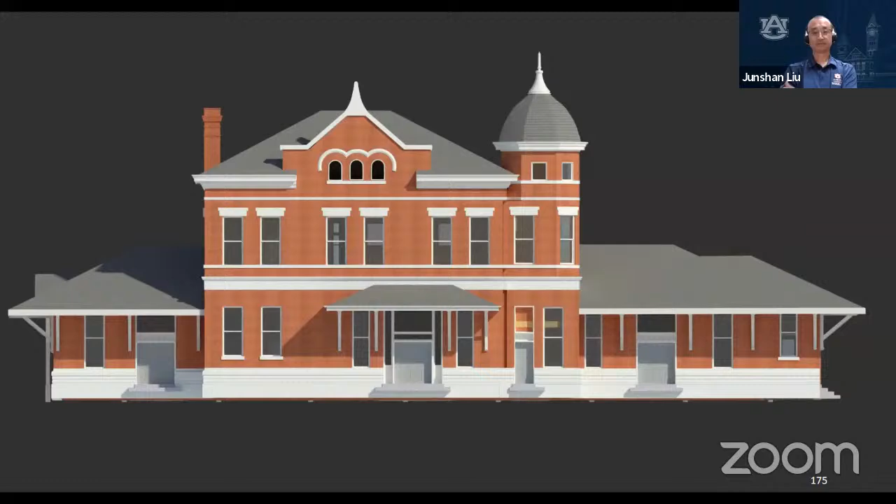So another project I did, also in Selma, is the bridge, one of the important civil rights structures. If you've heard about Bloody Sunday, or watched the movie called Selma, that's where it happened, on this bridge. The Bloody Sunday march actually started on the bridge. So I got a grant to work on this, making a record and also the HBIM model for the bridge.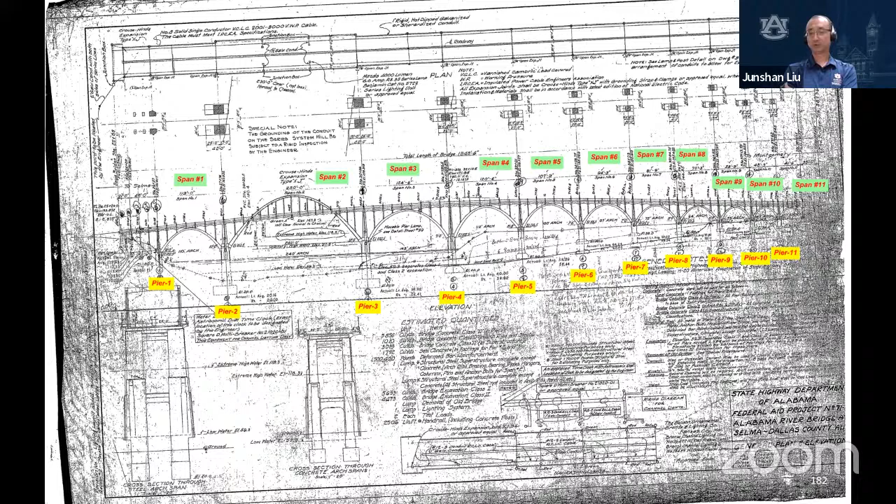We were able to find the original drawings. The bridge was built in the 1940s. So we found the historical drawings, and this is the point cloud. It took a lot of time for us to scan the entire bridge. This entire point cloud you can see, on and under, but still we left a lot of voids. Some of the places we were just unable to capture, too far and too high. So the bridge, the point cloud, the renderings, and we also flew a drone to take some pictures.

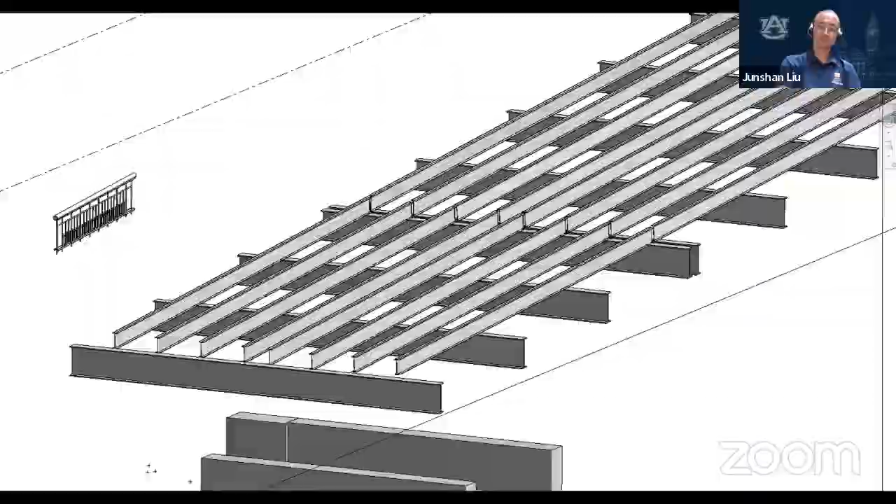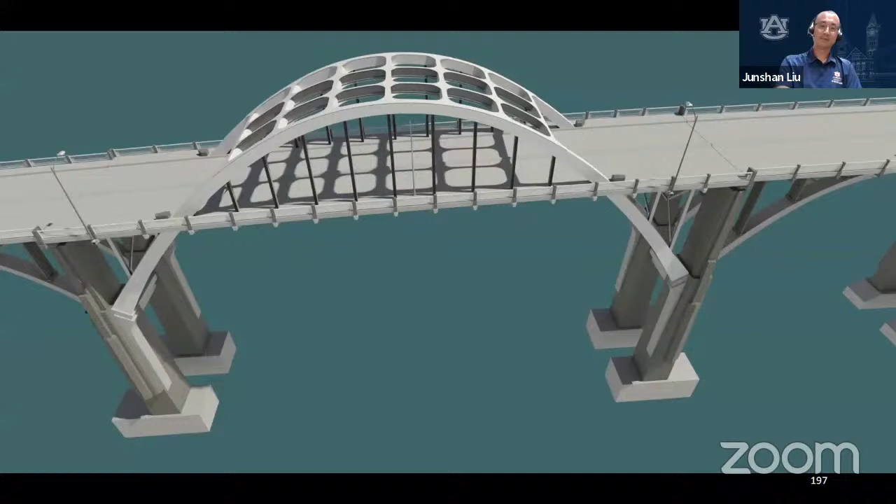So the renderings, as you can see, are combined with the point cloud. So I call it the most accurate HBIM model of the Selma bridge in the world now. It's the only one. So, more pictures of the project.

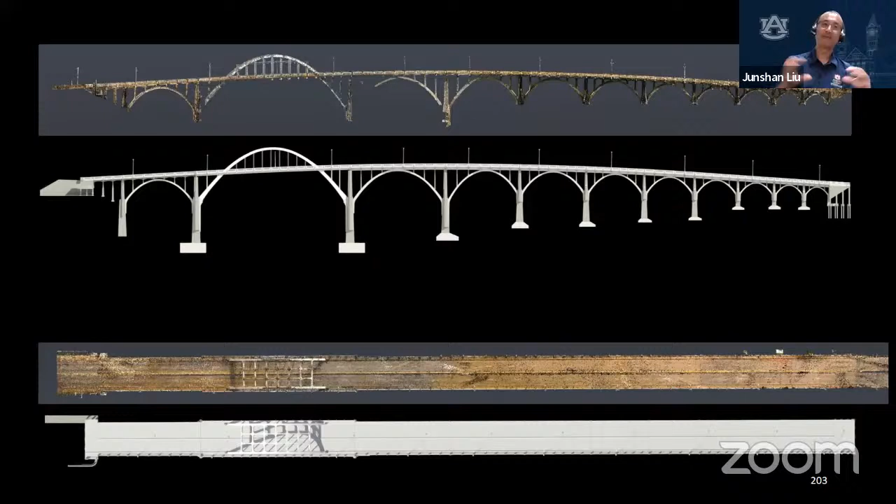So I know I keep saying this, like HBIM model, point cloud, right? So the purpose of the process, or the technology, is to have an accurate, comprehensive, and detailed digital record of the structure. So if the structure got lost, something happened to it, you still have the record that can be used to restore, to rebuild it.

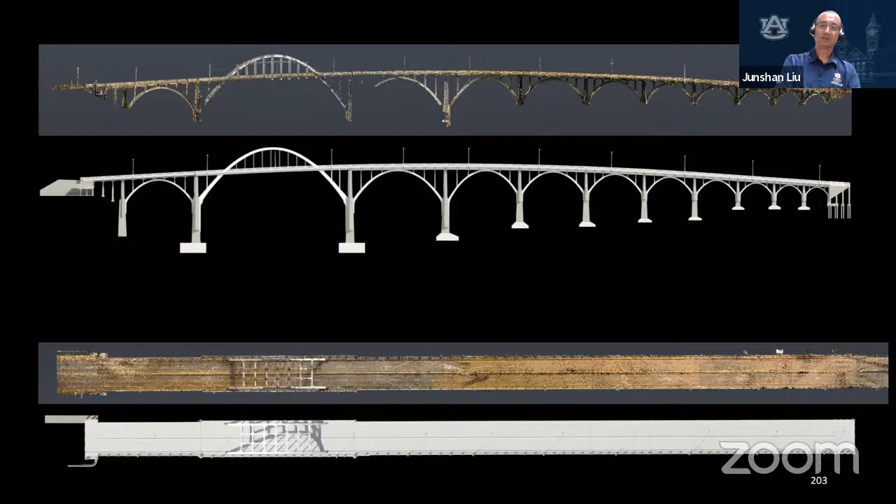Or another way to look at it is the digital record can also be used to make a presentation, or can be accessed by the general public. If the citizens cannot visit the place in person, they can try to see it, to visit it virtually online.

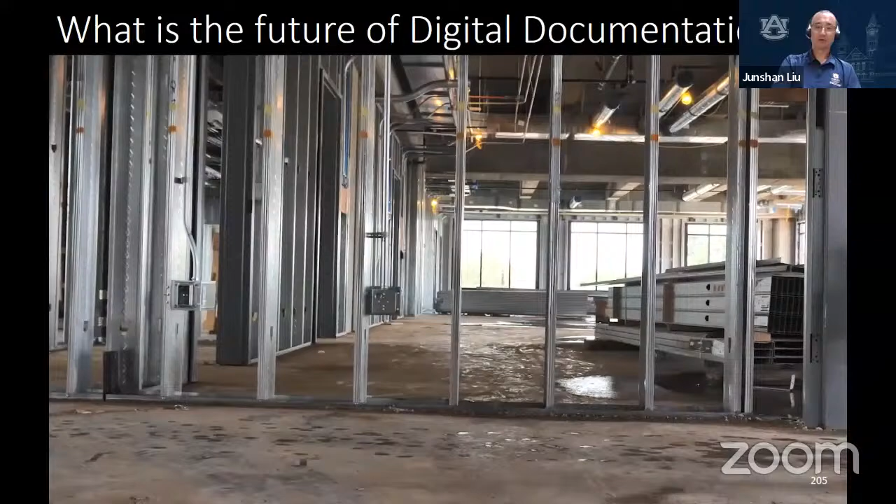So here, where's the future of the documentation? Where the technology is going. One thing, the robot, right? So here I have the video. Actually, my school, my department owns this device. You may have heard about Boston Dynamics. It's a robotic dog. So we put a scanner on top of the dog, and we walk the dog on the job site to do the scanning, instead of having a human move the scanners around. The dog can do that.

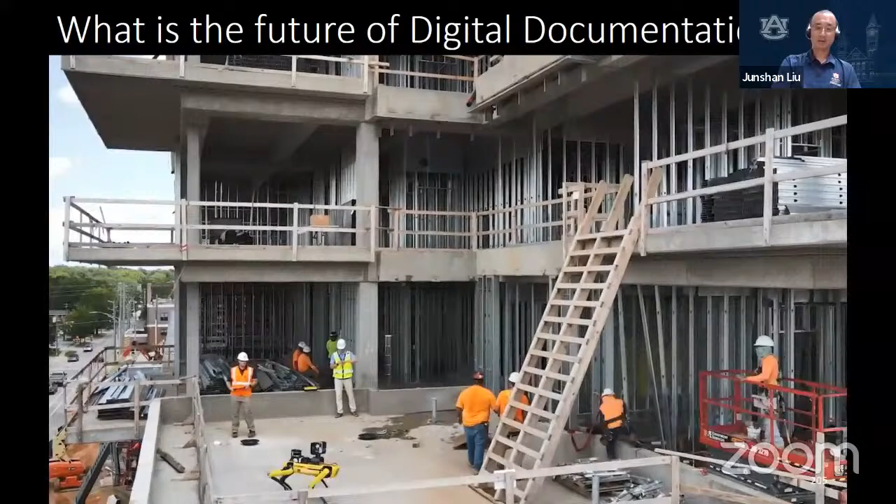And also you can program the dog. Suppose the dog can walk on the job site at night, programmed, right? So that can save the human labor and the time to do it. So I did a little testing with the dog and the scanner on an ongoing job site with my colleagues. Also, you can see the construction workers. Every time the dog comes to a job site, people like to take pictures with it.

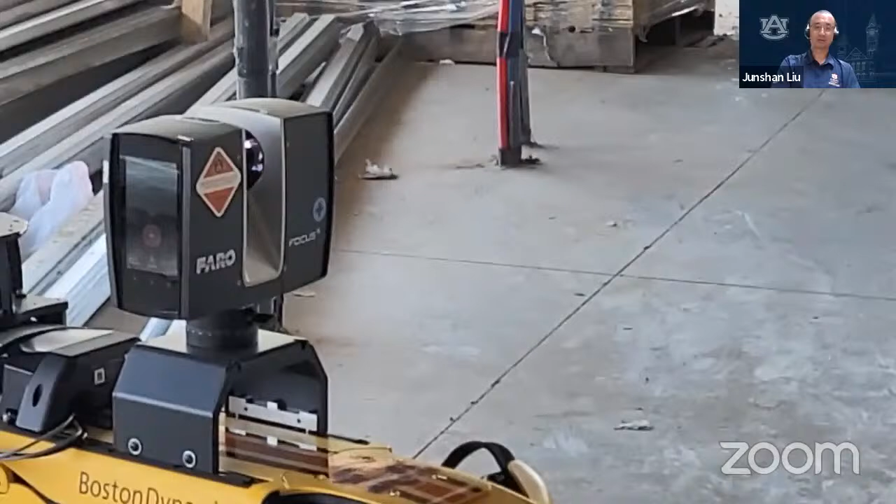So here the video shows how the scanning is done with the dog. You can see the scanner, the FARO scanner on top, and here the quick video. So the locations to scan were programmed and assigned to the dog. It's going to go to the spot, find the location, pause there and start scanning. So everything was pre-programmed. We didn't hit a button to do it. You will see the scanner start to spin here. Yep, so the scanning started. The dog just paused there. Once it's done, the dog will start walking to the next location, scanning again.

So one thing we found interesting, the dog actually has a really good self-balancing capability. You can see this is really rough. This is typical on the job site, right? So the dog was able to find a way to balance itself to make the scanner very level, and start the scanning. So another interesting video I captured, the dog's really, really intelligent. You can see it walking on some pipes, loose pipes. It still managed to balance itself.

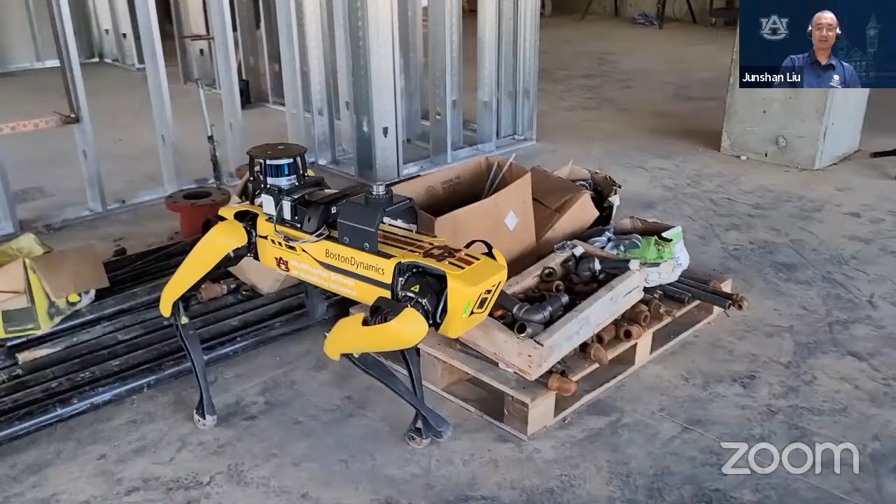Okay. So as I mentioned, I've got a few more minutes left to cover and show a little bit about my university and also my department. So Auburn University is one of the largest universities in the state of Alabama. We have more than 25,000 undergraduate students, and combined with the graduate students, we are over 30,000 students, with about 1,300 faculty members. We started in 1856. There are two public flagship universities in the state of Alabama, and Auburn University is one of them. We're ranked one of the best universities in the US, and we are an R1 research university.

So the state of Alabama is in the southeast of the US, and we are in the central east part of the state. Right here, you can see that the biggest city close to Auburn is Atlanta in Georgia. It's about 2 hours of drive from Atlanta to Auburn.

So my school is called the McWhorter School of Building Science. We started in 1945. We're in the College of Architecture, Design, and Construction. We graduate now about 180 students each year. We have an undergraduate degree in construction management, a master's degree in building construction, and even a doctoral degree, which started about 3 years ago. We also have online programs available for professionals who still work full time. So that's a little more about it.

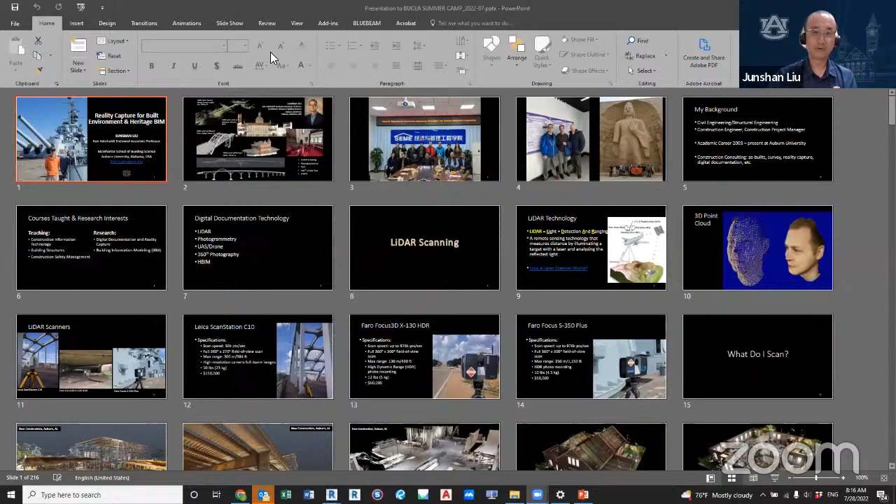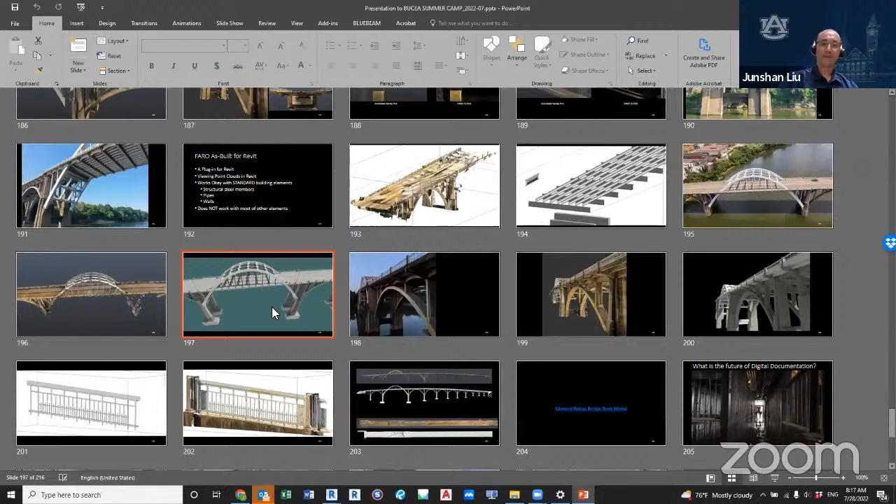One void I had was with a bridge, as you can see in the background, the Selma Bridge. The footings, the foundation of the bridge, right? There's no way you can dig up the footing with an excavation to scan it, and you cannot take pictures. The only record we had was the historical drawing. We just made the assumption that the people built the bridge based on the drawings, really accurately. So I used the drawings to model the foundation, the footing part of the bridge, like here. You just use your best knowledge and all the information available to model or replicate that. That's a great question you guys have.

Yeah, let's see. Okay, any other questions? No. Actually, you managed your time very well.